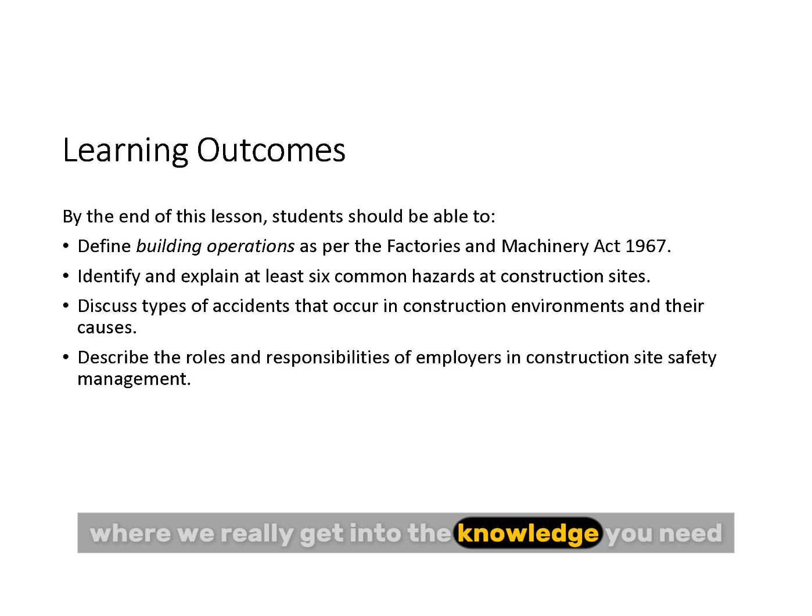Imagine a new skyscraper going up or a factory being built. It looks amazing, right? A real marvel. But behind all that, behind every single beam, there's this world of unseen dangers. It's a constant dance with risk. Today, we're pulling back the curtain on construction safety. It's not just rules and regs. It's about the people building our world. It's about progress and, yeah, a stronger economy, too.

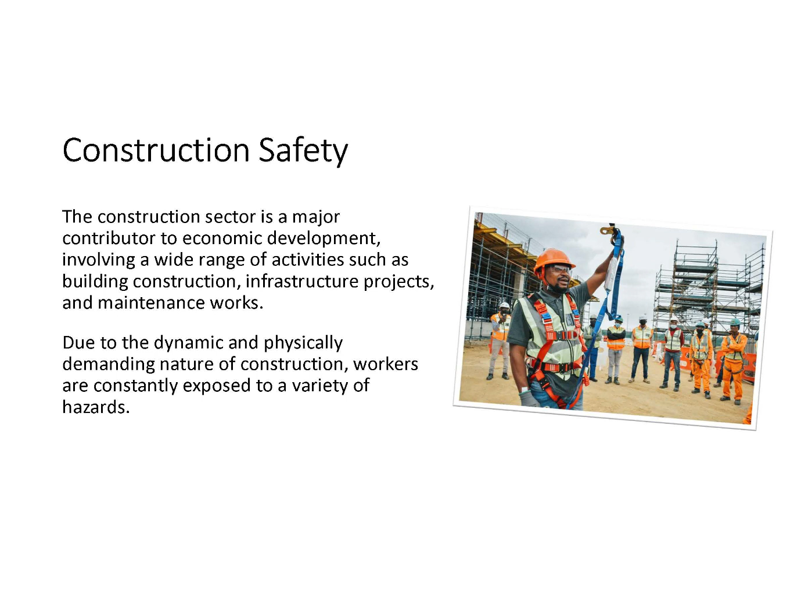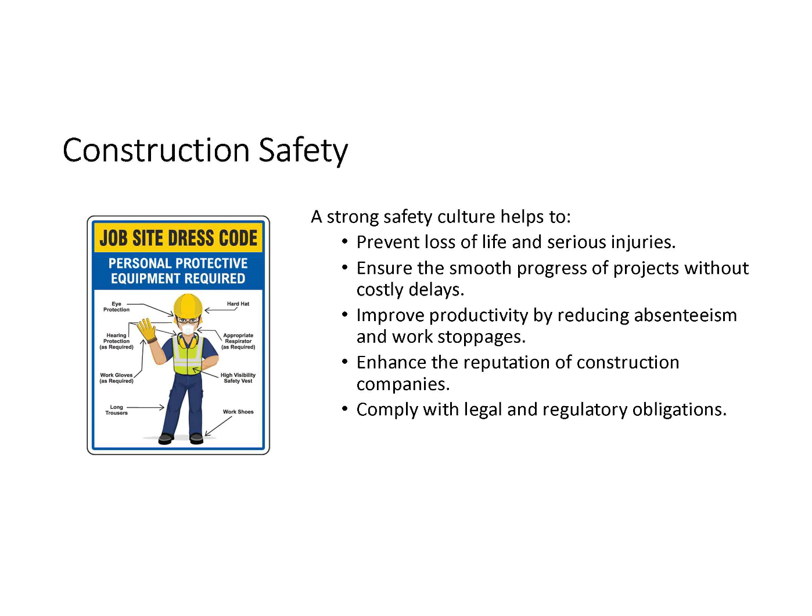And for our deep dive today, we're drawing on a whole range of sources: articles, detailed research, expert notes. They cover pretty much everything from the most common hazards you'd find on a site, right through to the complex legal stuff and what employers have to do. Our mission really is to pull out the absolute must-know info, find those facts that might surprise you, and help you see why this affects everyone, whether you're actually on a site or just curious about how things get built safely.

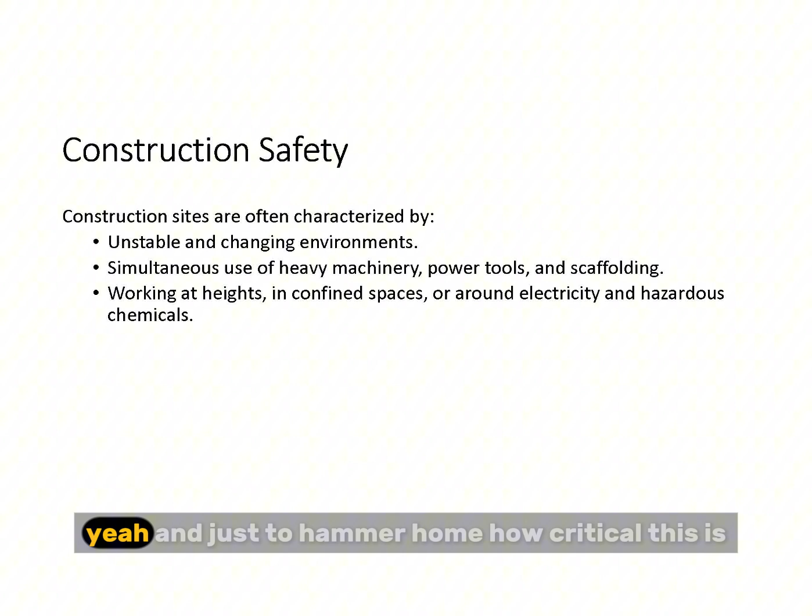Just to hammer home how critical this is, let's kick off with a pretty stark statistic. Our sources are clear: globally, and specifically in places like Malaysia, construction is consistently right up there at the top for workplace deaths and serious injuries, year after year. Just think about that for a moment. It immediately tells you why we need to talk about safety in this sector. It's not just numbers, it's actual lives.

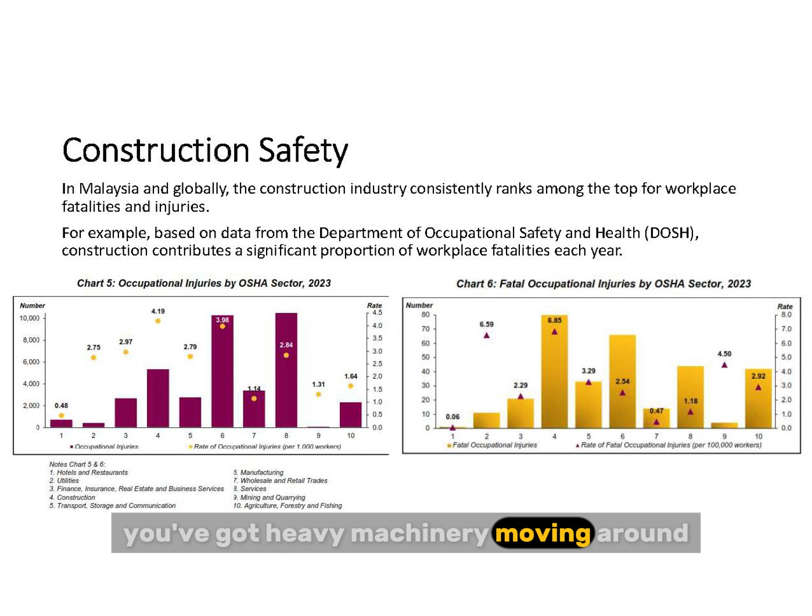And when you look at construction itself, the nature of the work, it becomes obvious why the risks are so high. These places are dynamic, they're physically tough, often unstable, and they're changing literally day by day. You've got heavy machinery moving around, power tools buzzing, temporary structures like scaffolds, all happening at the same time. Plus, workers are often way up high or maybe in tight, confined spaces, dealing with live electricity, potentially hazardous materials.

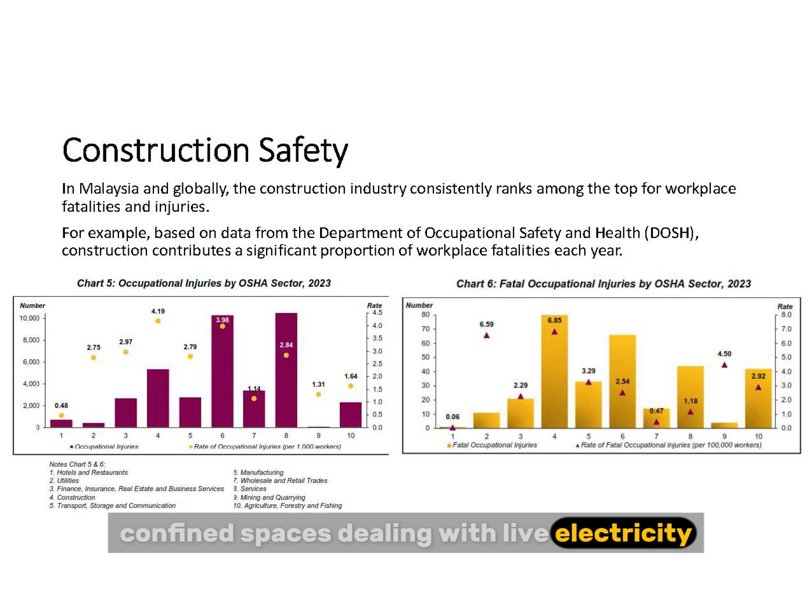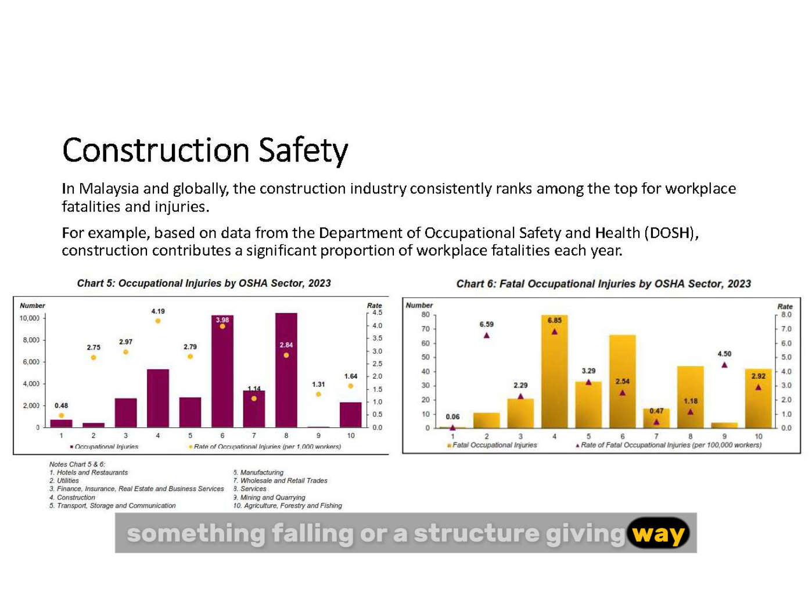It's incredibly complex. And that dynamic nature means the dangers aren't just the obvious ones, like something falling or a structure giving way. Our research points out other hazards too: ergonomic risks, for instance, the strain from lifting heavy stuff all day or repetitive movements. Then you've got environmental factors like extreme heat, maybe, or that constant loud noise that can cause real long-term problems. And maybe surprisingly, biological hazards, things you might not immediately think of, like mold or bacteria. And the fact that many jobs are temporary, often outdoors, just adds another layer of unpredictable risk.

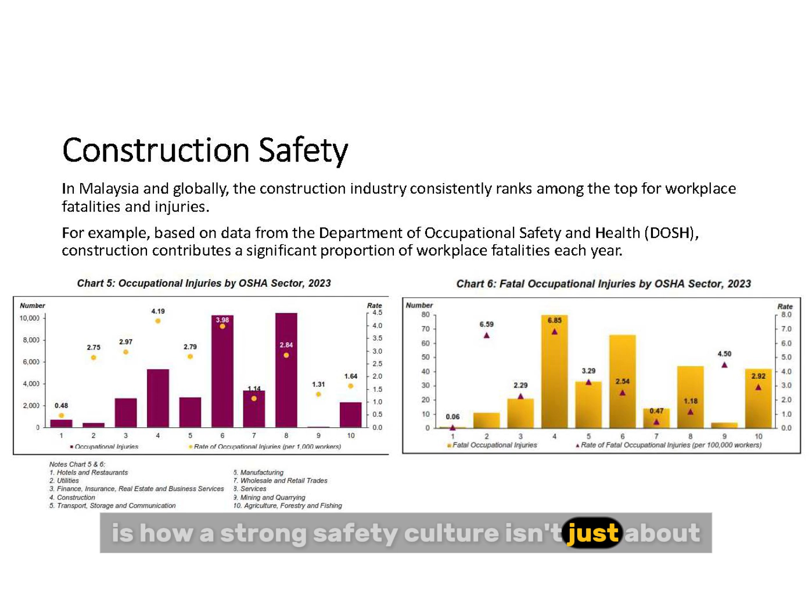And what's really interesting, perhaps a bit counterintuitive, is how a strong safety culture isn't just about ticking boxes or avoiding accidents. Our sources strongly suggest it actually drives innovation and project success. When workers feel safe, genuinely looked after, they're more engaged, they're more likely to suggest improvements, and ultimately they build better, faster, and yes, more economically. It flips the whole idea of safety from being just a cost to an advantage. Precisely, a competitive advantage.

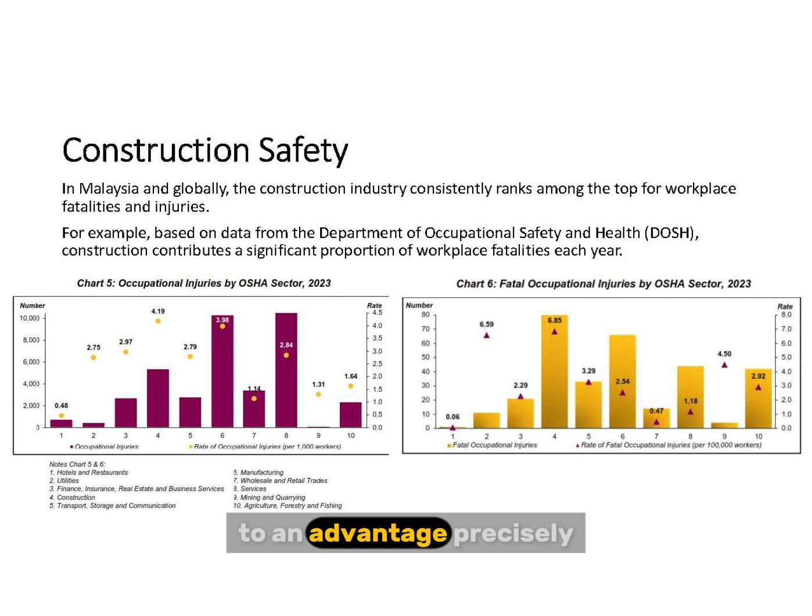Beyond preventing tragedy, it keeps projects running smoothly, avoids those expensive delays, boosts productivity because fewer people are off injured. And of course, it enhances the company's reputation and makes sure they're following the law.

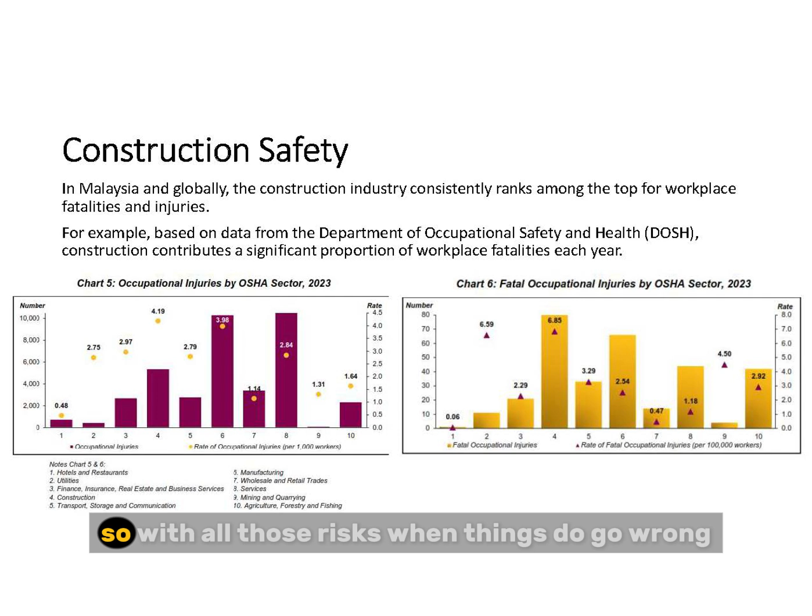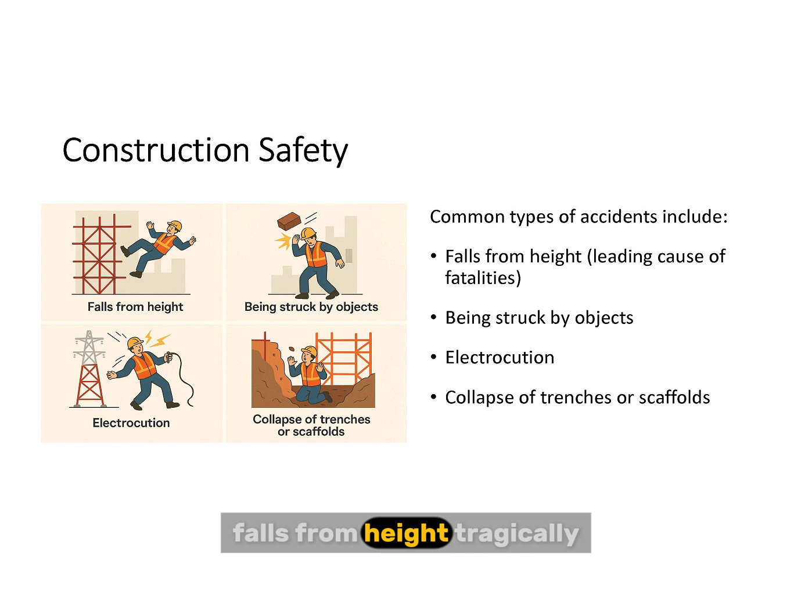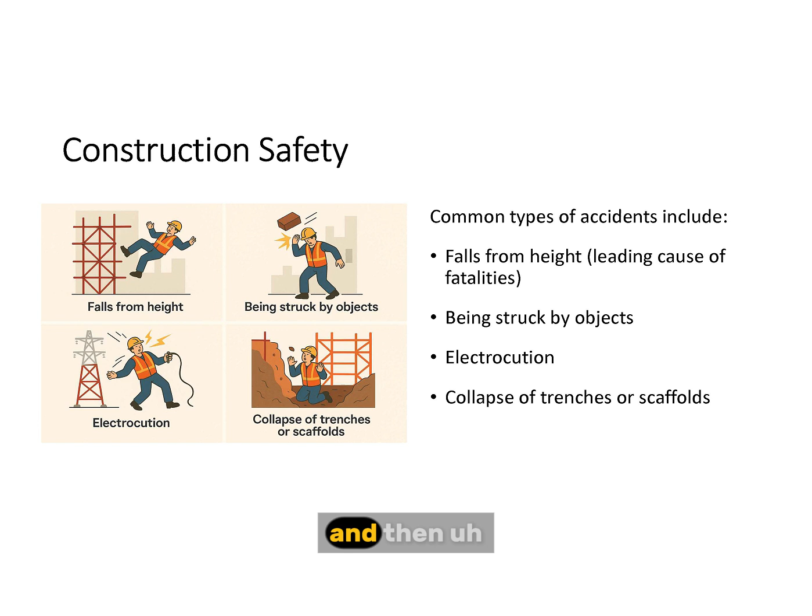So with all those risks, when things do go wrong, what are the most common and the most devastating types of accidents? Our sources are very specific here. Falls from height, tragically, that's the number one killer in construction. It's a really sobering fact. Beyond that, you see workers being struck by objects, electrocution is a big one, and then trenches or scaffolds collapsing suddenly. It's a harsh reality.

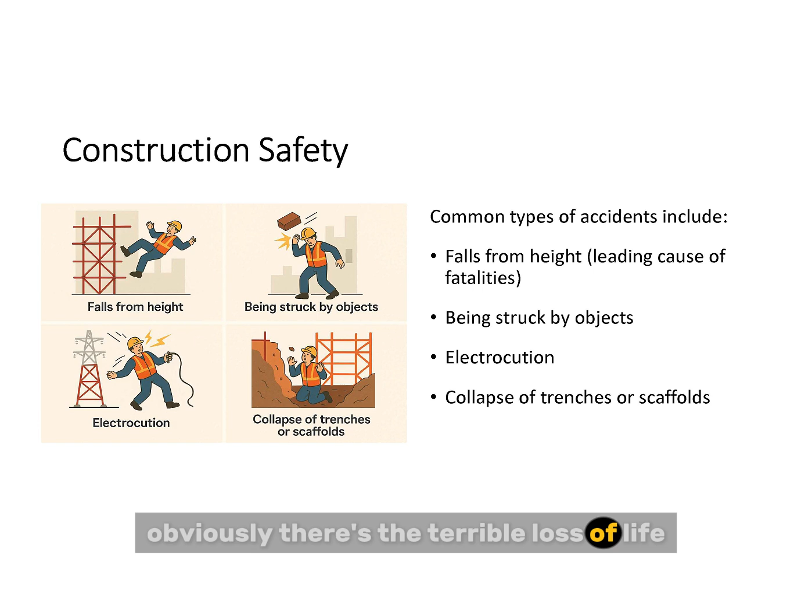And the impact just spreads outwards, doesn't it? It's not just the immediate incident. Obviously, there's the terrible loss of life or maybe long-term disability for the worker involved. But then employers face serious legal trouble, massive fines, projects get delayed, costs spiral. And something often missed, but incredibly important, is the emotional trauma. For the colleagues who saw it happen, for the families, that impact lasts.

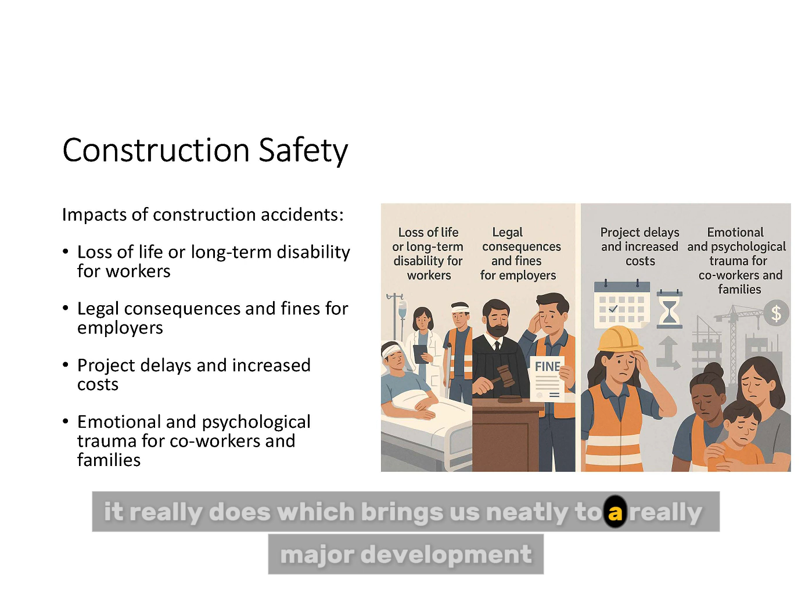Which brings us neatly to a really major development in the legal side of construction safety, especially relevant if you're operating in Malaysia. That's the OSHA Amendment Act 2022, A1648 as it's known. This wasn't just a minor update. It was designed specifically to significantly boost safety standards in construction and other sectors too. Yeah, this is a fundamental shift. It really changes the game.

Before, certain workplaces might have been exempt based on size or registration status. Not anymore. Under this act, all workplaces are covered by OSHA automatically. And crucially for this discussion, that includes construction sites of every size, no more exemptions based on worker numbers. That's a huge expansion.

And it goes deeper. The Act now says every single employer, no matter how small their operation, has to prepare and actually implement a written safety and health policy. It's not just good practice anymore, it's a legal requirement. It forces that top-down commitment.

Here's where it gets particularly interesting for construction: this idea of shared accountability. Contractors and subcontractors have always had duties under OSH law. But now the clients, the developers, the ones acting as principal employers, can also be held legally responsible for safety breaches on their projects. Project owners now share that legal accountability with the builders. So if you're developing a site, you're legally on the hook for safety, even if you're not managing the day-to-day stuff. That is a massive shift in responsibility.

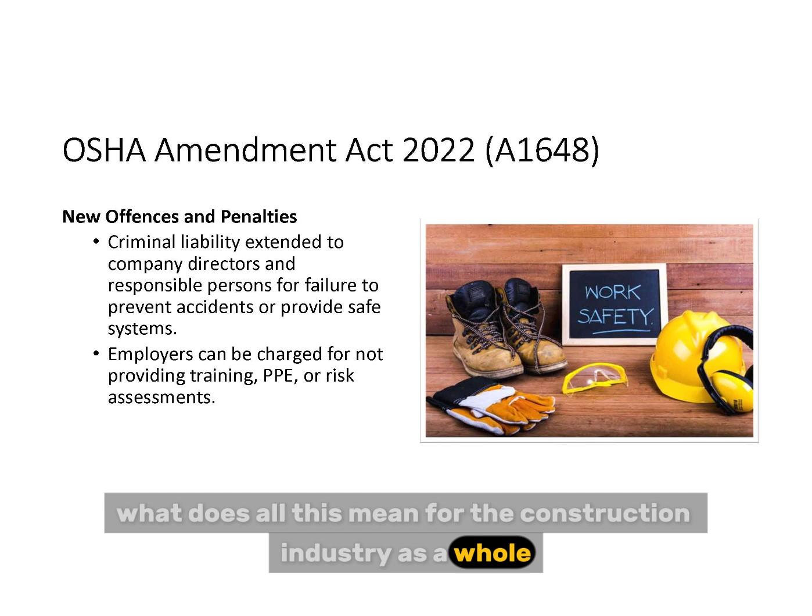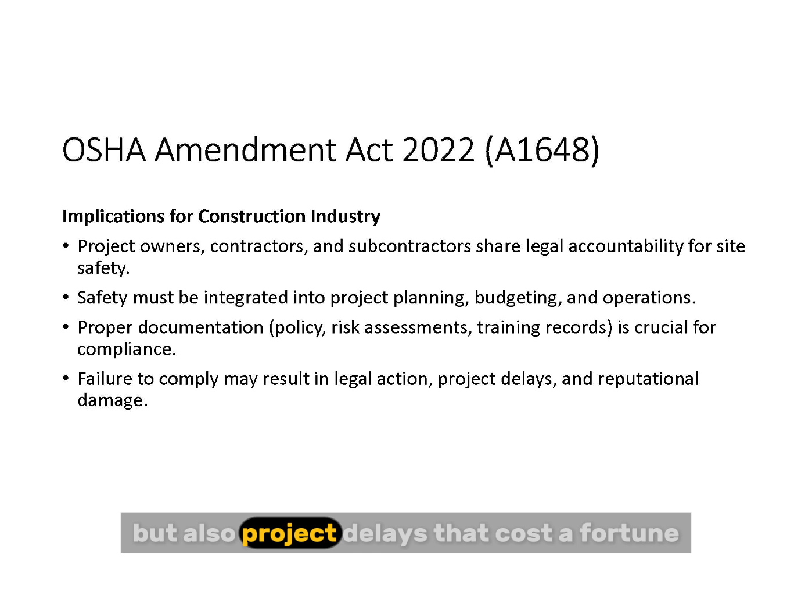So taking a step back, what does all this mean for the construction industry as a whole? What are the big takeaways? Well, the implications are pretty wide-ranging. Basically, safety can't be an afterthought anymore. It has to be baked into every stage of a project, right from the initial planning, the budgeting, through to the daily work on site. Proper documentation becomes absolutely critical: those written policies, the risk assessments, training records. It's not just nice to have, it's essential proof. And frankly, failing to comply means serious legal trouble, huge fines, yes, but also project delays that cost a fortune and real damage to a company's reputation. It's a complete shift in mindset and practice.

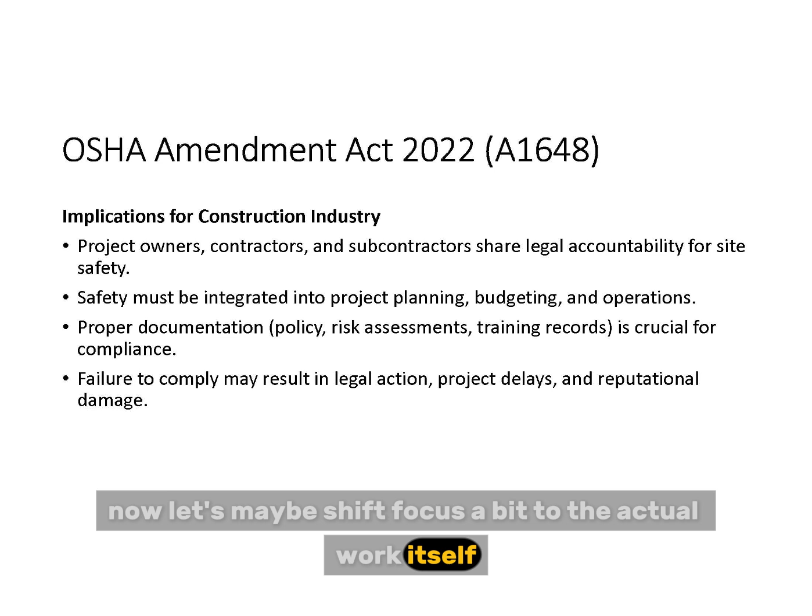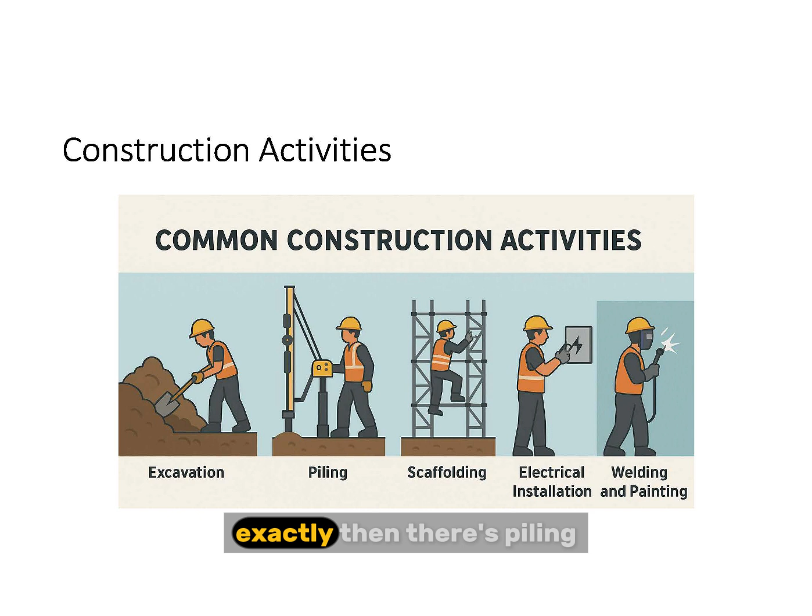Now, let's shift focus a bit to the actual work itself. What happens on a typical construction site? What are the common activities? We're talking things like excavation, digging trenches, foundations, basements, which immediately brings risks of collapse to mind. Exactly. Then there's piling, driving those big columns into the ground for support, and scaffolding, obviously, those temporary platforms for working up high. And that's just scratching the surface.

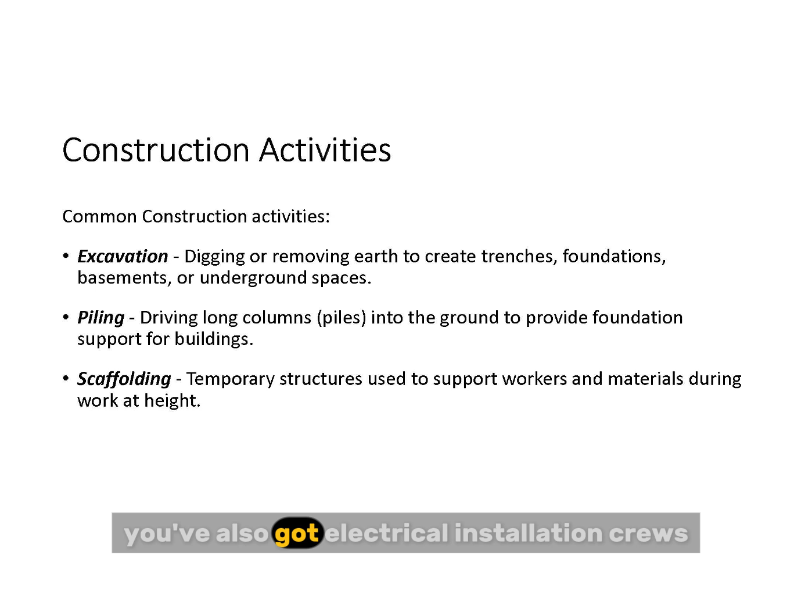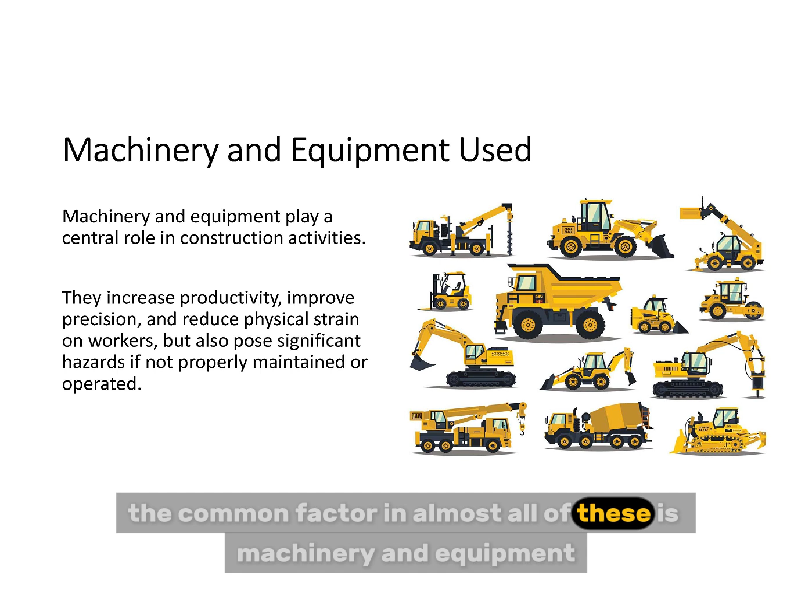You've also got electrical installation crews, material handling, lifting, moving, loading heavy stuff, and specialized jobs like welding or painting. The common factor in almost all of these is machinery and equipment. These tools boost productivity, they allow for incredible precision, but they also bring significant hazards if they're not looked after properly or if people aren't trained to use them right. It's that classic double-edged sword.

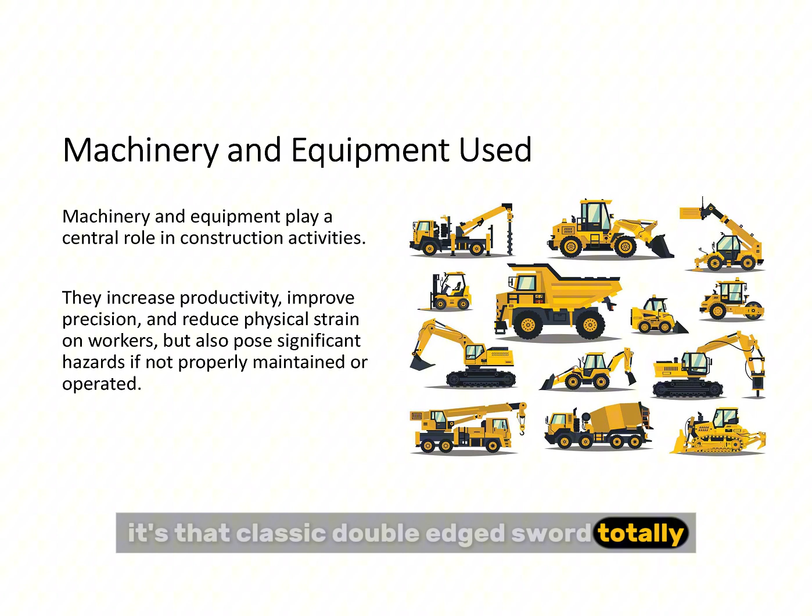Even simple hand tools, hammers, screwdrivers, can cause injuries if people aren't careful or if the tools are faulty. Then you have ladders and stairs for getting up high. Seems basic, but they have to be stable, positioned correctly. It's vital. Scaffolds, too, whether fixed or mobile, they need to be put up by trained people, inspected constantly. You can't cut corners there.

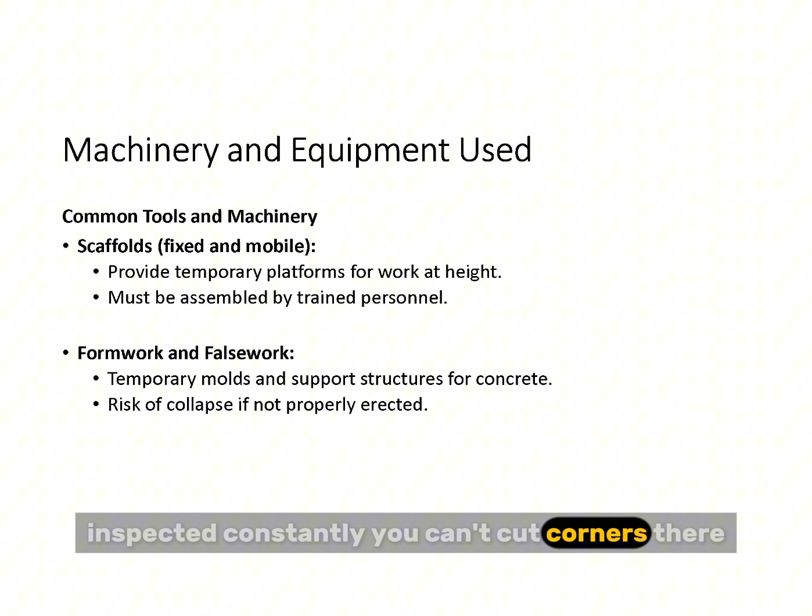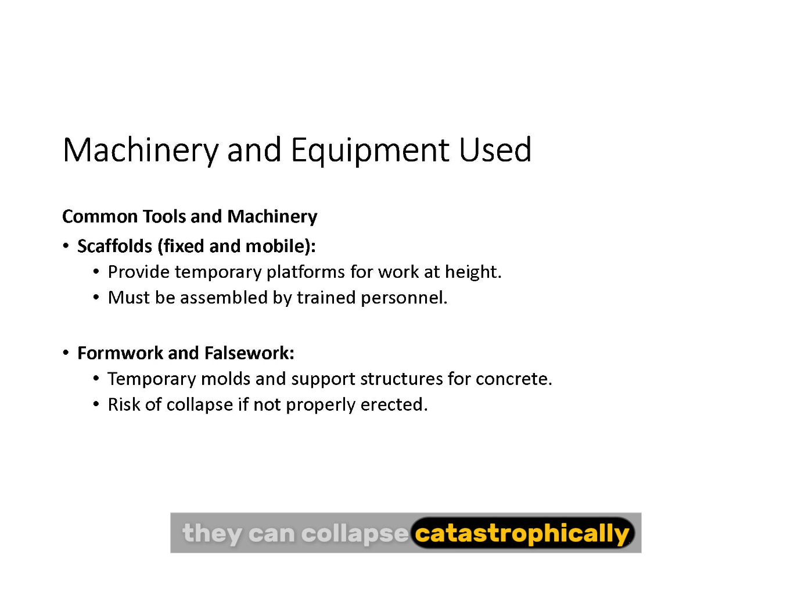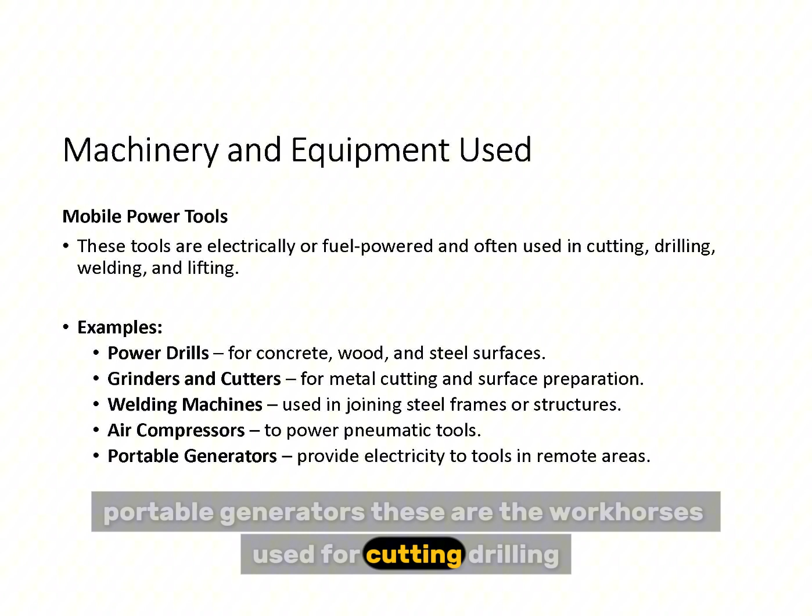No, you really can't. Then there's formwork and falsework, those temporary molds for concrete. If they're not built right, or if they're taken down too soon, they can collapse catastrophically. And finally, all those mobile power tools: drills, grinders, welding sets, air compressors, portable generators. These are the workhorses used for cutting, drilling, joining, lifting, everything.

And there's another layer of safety regulation here that really underscores the risk with some equipment, isn't there? The Certificate of Fitness. Yes, the COF. For certain high-risk heavy machinery, it's mandatory. It's an inspection and certification process run by DOSH.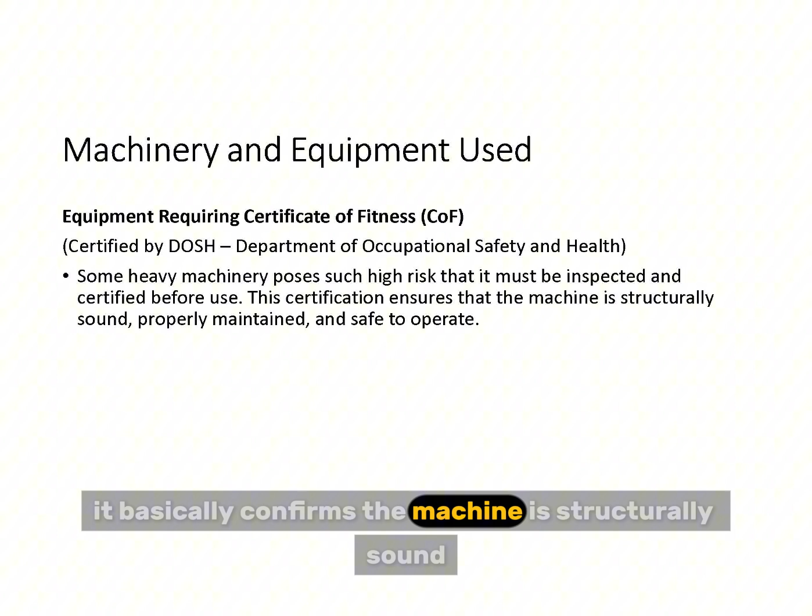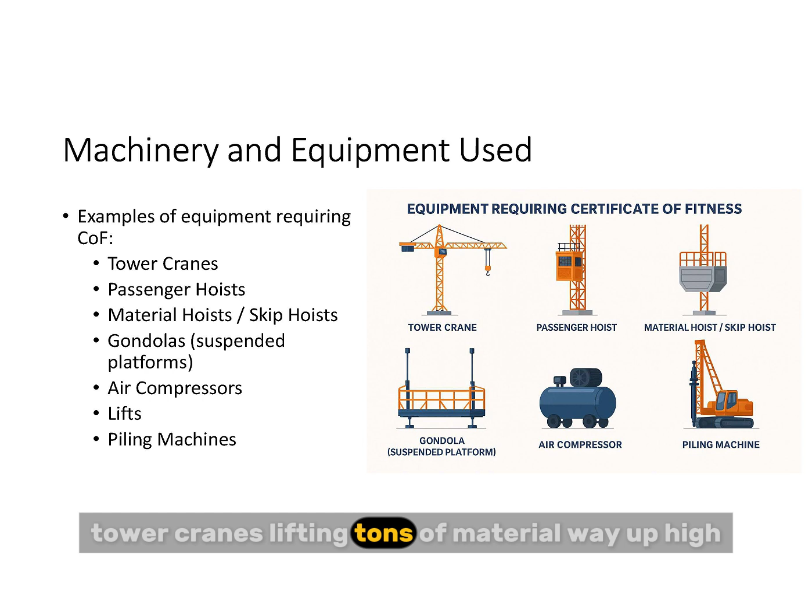It basically confirms the machine is structurally sound, it's being maintained properly, and it's actually safe to operate. So what kind of machines need this COF? Well, think about the really big stuff. Tower cranes lifting tons of material way up high.

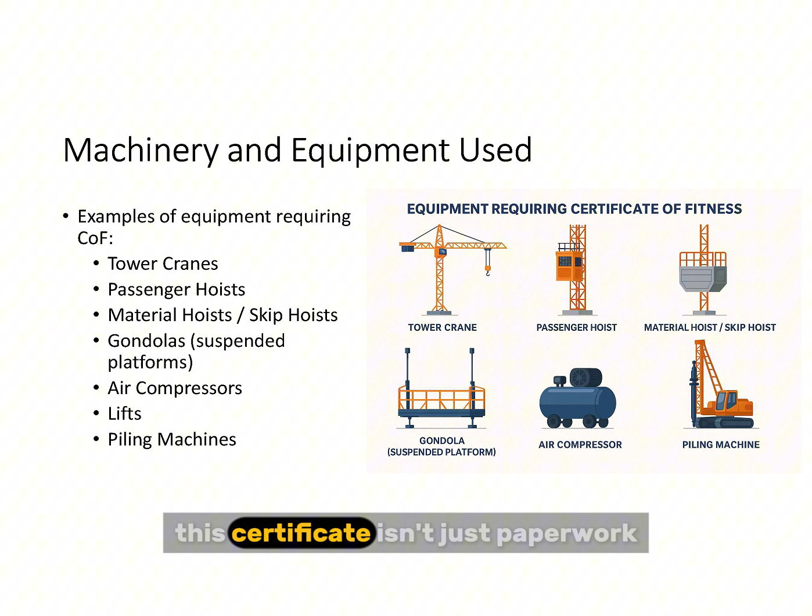Passenger hoists, material hoists, gondolas used for facade work, air compressors, lifts installed on site, those huge piling machines. This certificate isn't just paperwork, it's a critical check to prevent major failures and protect lives. Okay, let's dive deeper now into the specific types of hazards you find on construction sites.

They're really diverse. Starting with physical hazards, working at height, we've mentioned it, it's huge. The risk of falling from scaffolds, ladders, unfinished floors. And the control: proper fall protection is non-negotiable. Harnesses, guardrails, safety nets. Then you've got noise.

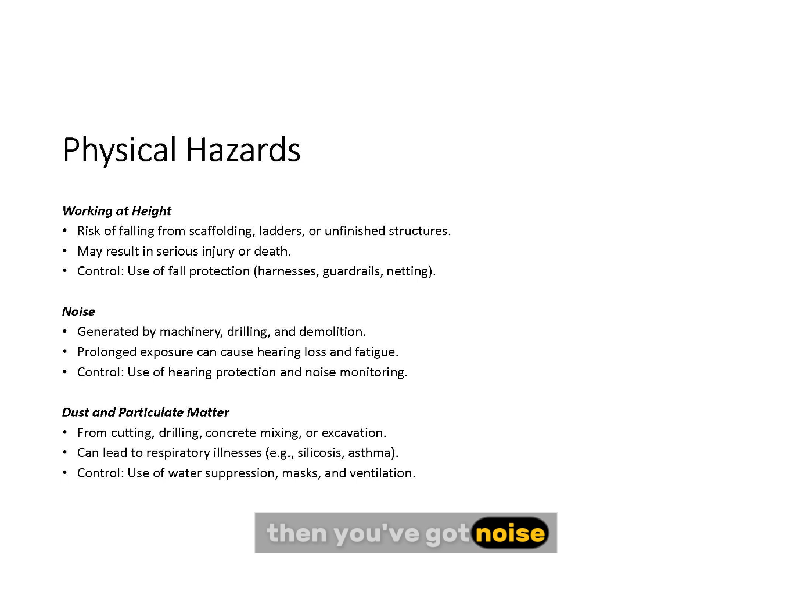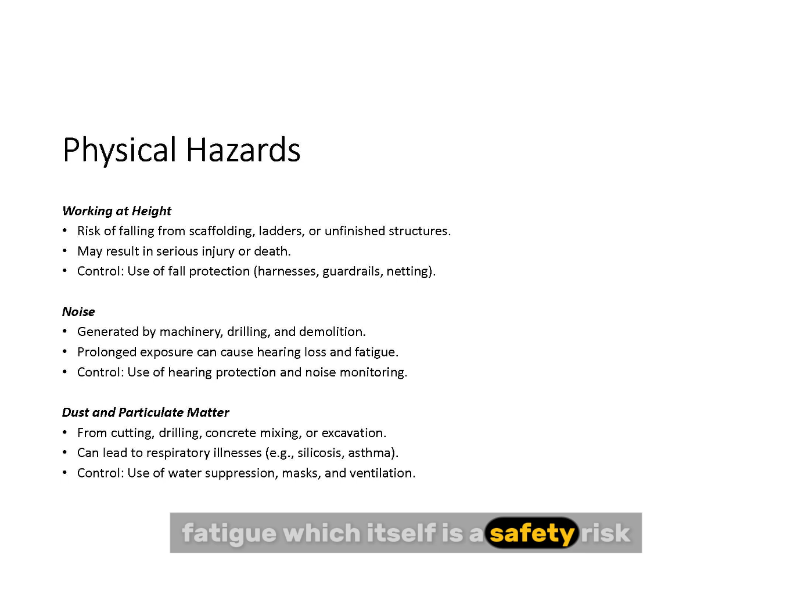It's almost unavoidable on many sites, from machinery, drilling, banging. Long-term exposure leads to hearing loss, fatigue, which itself is a safety risk. So mandatory hearing protection, noise monitoring programs are key controls.

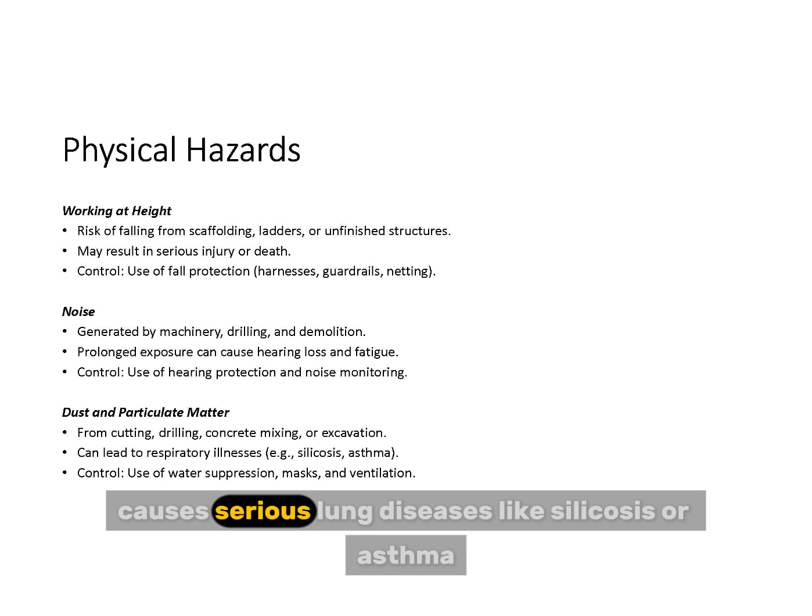And dust, particulate matter from cutting concrete, mixing cement, it gets everywhere. Causes serious lung diseases like silicosis or asthma. Controls include using water to suppress dust, wearing proper masks, and ensuring good ventilation.

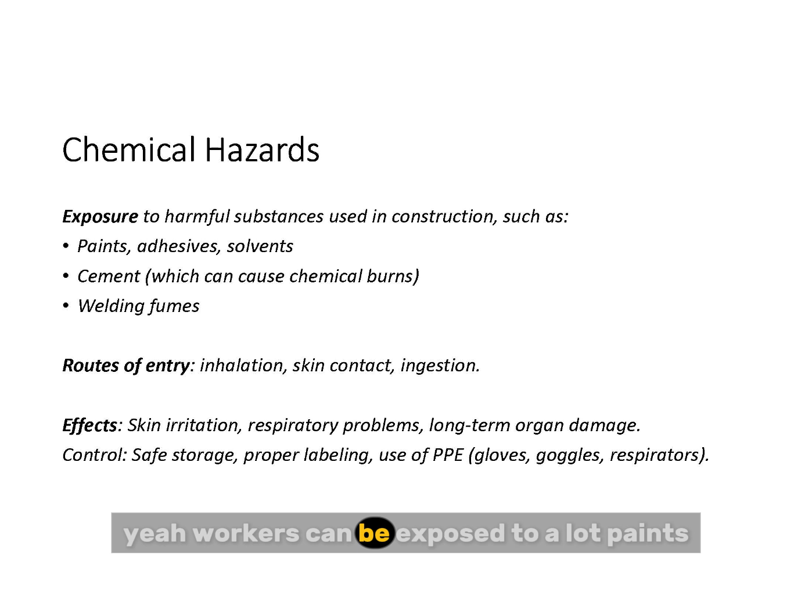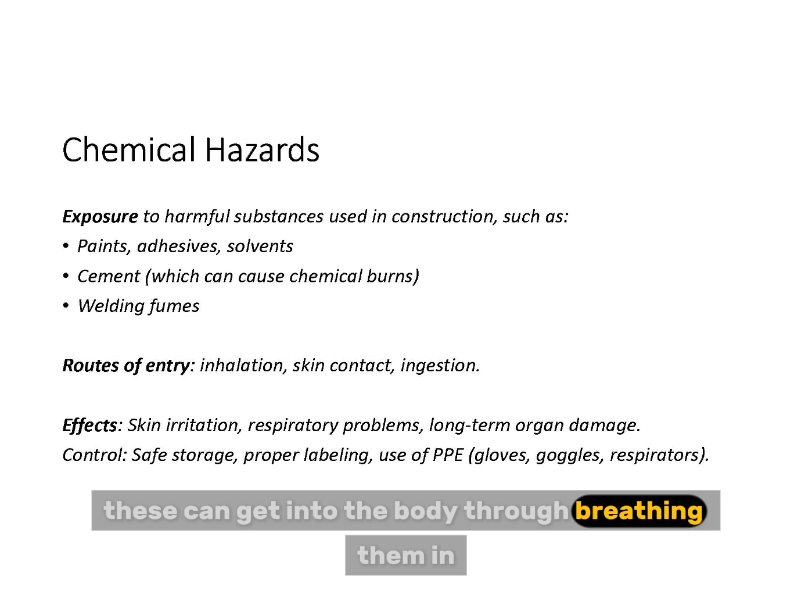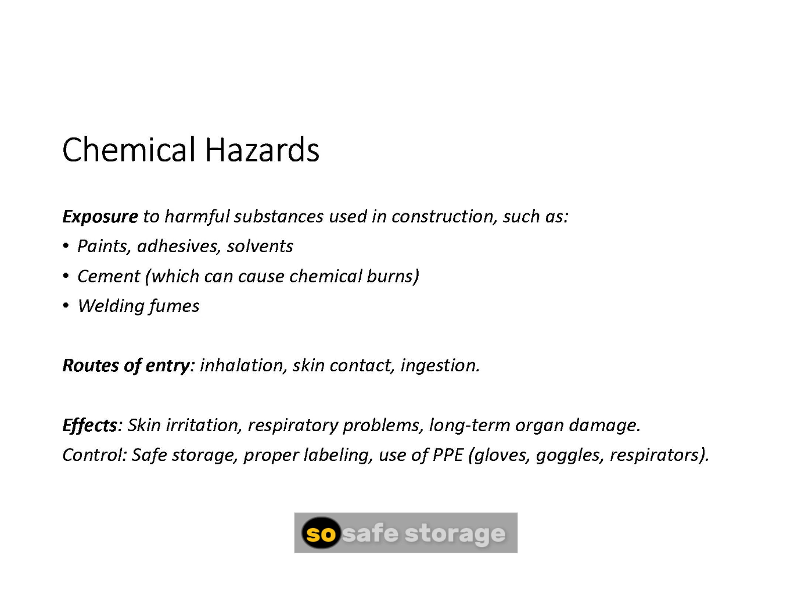Okay, what about chemical hazards? Yeah, workers can be exposed to a lot. Paints, adhesives, solvents, even wet cement, which can cause chemical burns. Welding fumes are another big one. These can get into the body through breathing them in, skin contact, sometimes even accidentally swallowing them. The effects range from skin irritation to serious respiratory issues or even long-term organ damage. So safe storage, clear labeling of chemicals, and the right PPE, like specific gloves, goggles, respirators, are absolutely essential.

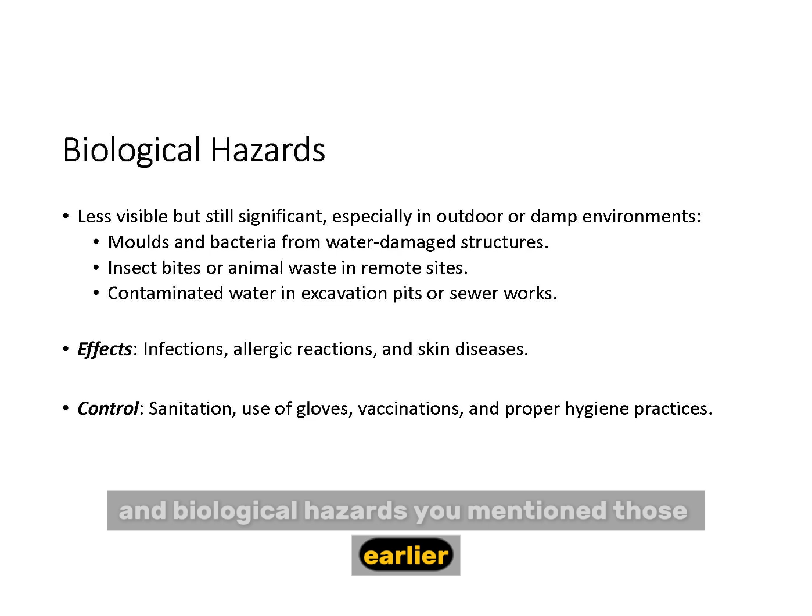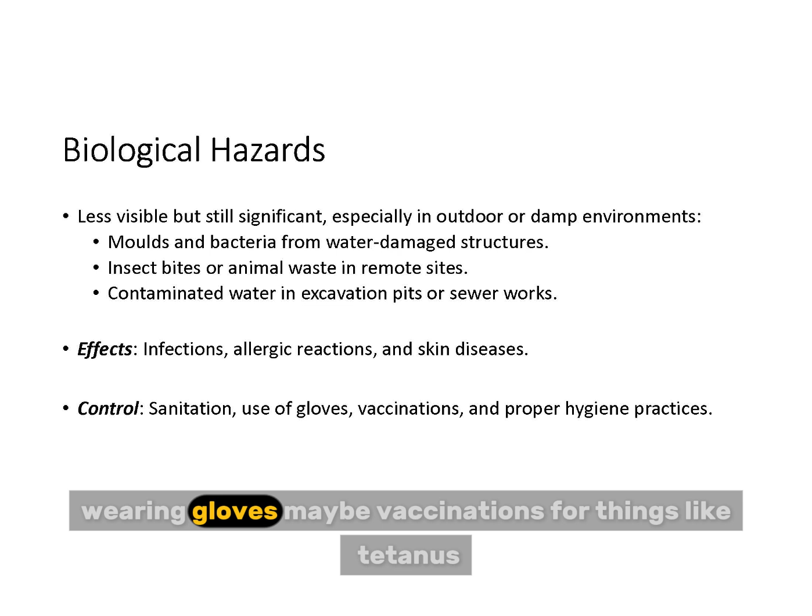And biological hazards, you mentioned those earlier. What does that look like on a construction site? It's often less obvious, especially outdoors or in damp areas. You might find mold or bacteria growing, maybe insect bites or stings, animal droppings on remote sites, or contaminated water in pits. These can lead to infections, allergic reactions, skin problems. Controls here are about good sanitation, wearing gloves, maybe vaccinations for things like tetanus, and just really good personal hygiene practices.

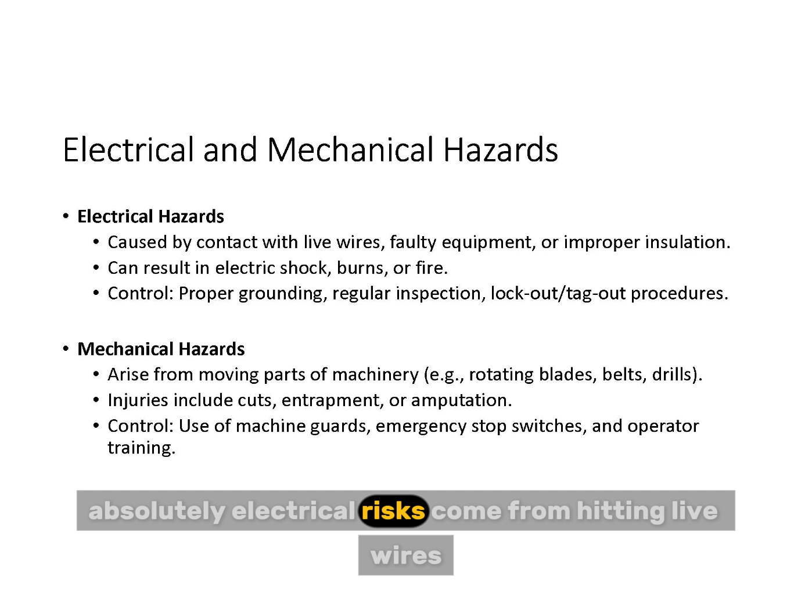And of course, electrical and mechanical hazards are everywhere. Absolutely. Electrical risks come from hitting live wires, using faulty equipment, leading to shock, burns, fires. Proper grounding, regular checks, and this critical procedure called lockout, tagout are vital.

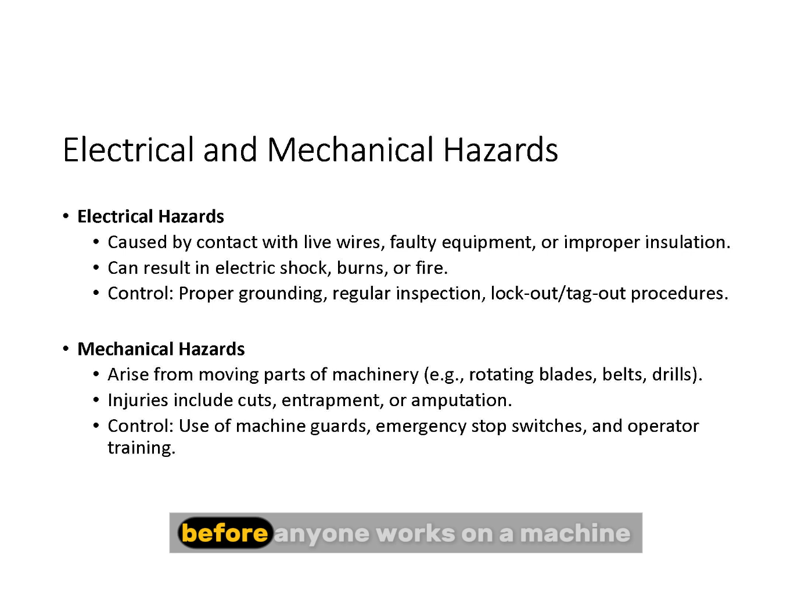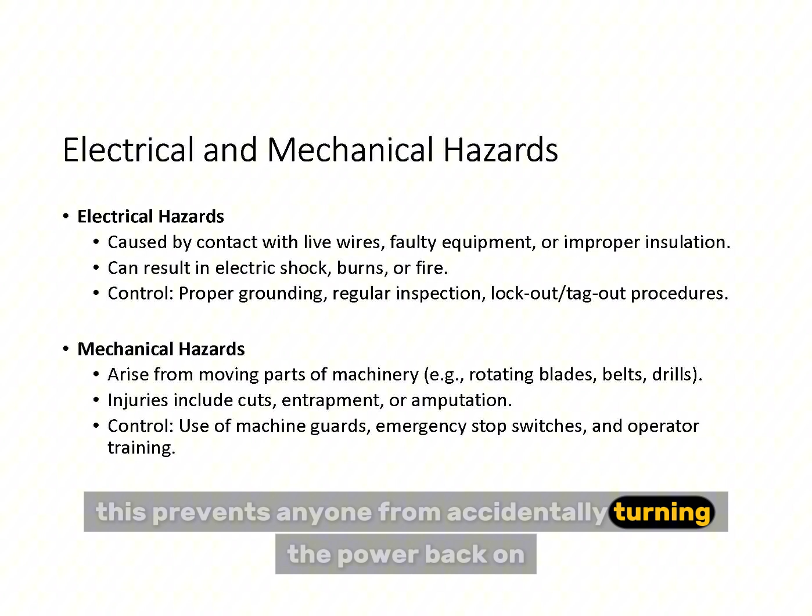Explain lockout, tagout quickly. Sure. Before anyone works on a machine, its power source is physically locked off, usually with a padlock, and a tag is attached saying 'do not operate.' This prevents anyone from accidentally turning the power back on while someone's working on it. Simple, but saves lives. Got it.

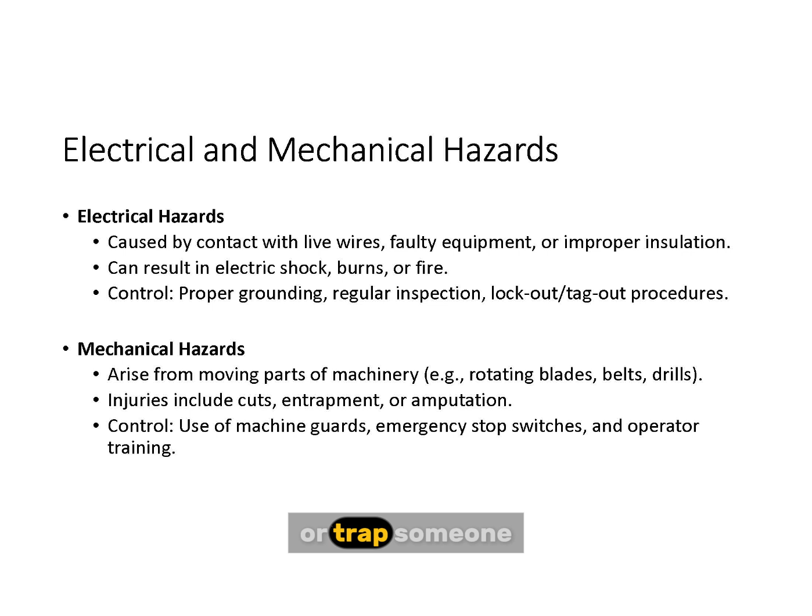And mechanical hazards, that's about the moving parts of machinery, blades, belts, gears, things that can cut, crush, or trap someone. The main controls are machine guards to physically block access, clearly visible emergency stop buttons, and really thorough operator training.

And finally, ergonomic hazards. These seem less dramatic maybe, but can be really debilitating. They definitely can. This is about poor posture, doing the same motion over and over, or lifting heavy things improperly. Think about constantly bending or twisting or carrying heavy loads without help. It leads to musculoskeletal disorders. Back pain is a huge one, and general fatigue, which again increases accident risk. So training on proper lifting techniques, using mechanical aids like hoists or carts, and rotating jobs can make a big difference.

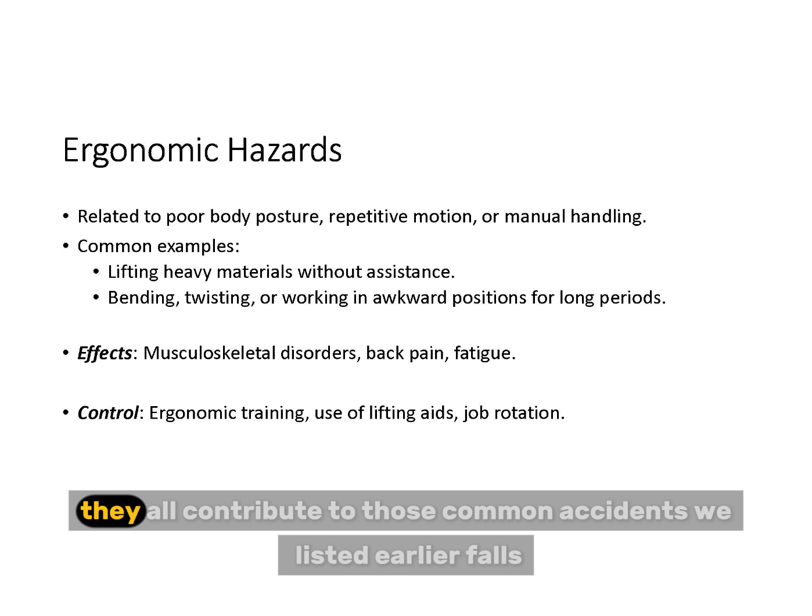And really, all these different hazards, physical, chemical, biological, electrical, mechanical, ergonomic, they all contribute to those common accidents we listed earlier: falls, being struck by things, collapses, shocks, and so on.

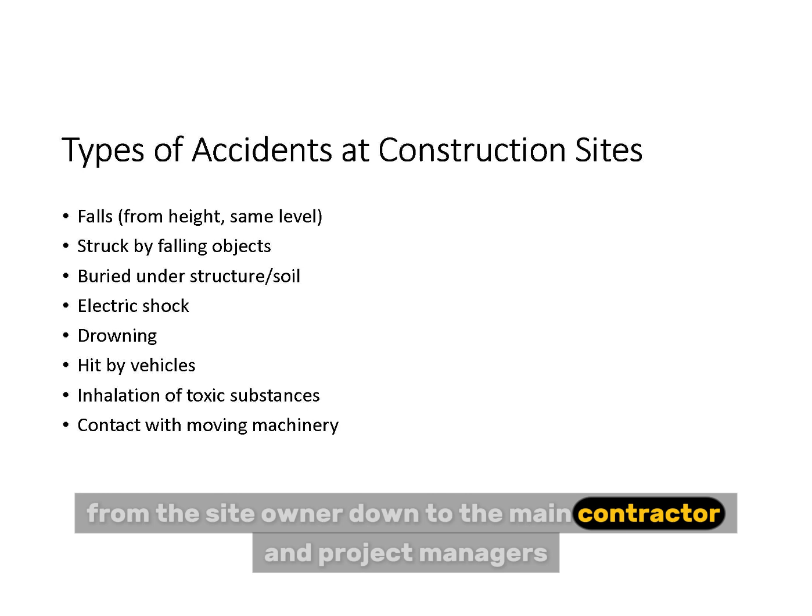Okay, so we've got this complex web of hazards, significant legal changes. It really puts the spotlight on the employer, doesn't it? From the site owner down to the main contractor and project managers. How do they actually manage safety day to day? What are their core responsibilities?

Well, the bottom line, legally and ethically, is that employers are responsible for their workers' safety. Full stop. And effective safety management isn't just about avoiding fines. It genuinely prevents accidents. It builds that positive safety culture we talked about. And honestly, it makes the project run better.

So what's the first step? That written policy. Exactly, that's foundational and now legally required by the OSHA Act. It's more than just a piece of paper. It's the employer's formal commitment. It needs to outline their safety goals, who's responsible for what, and the strategies they'll use. And crucially, it has to be communicated effectively to everyone on site and reviewed regularly to keep it relevant.

And they need people to implement this policy, right? Safety personnel. Absolutely, competent people are key.

Roles like the Safety and Health Officer (SHO) or Site Safety Supervisor (SSS) are vital for doing inspections and checking compliance day to day. And that Safety and Health Committee, in higher risk workplaces, is crucial for investigating incidents, advising management, and making sure workers have a voice in safety matters.

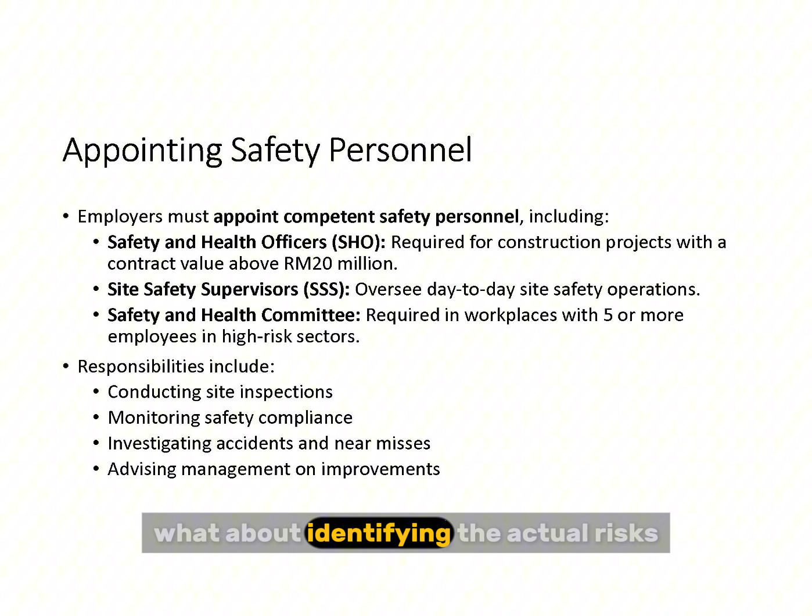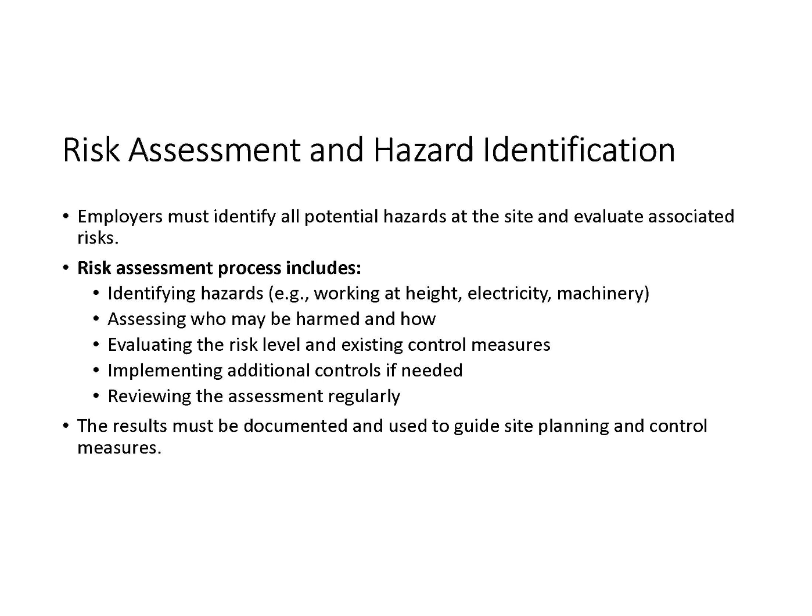Okay, policy people. What about identifying the actual risks? That's risk assessment and hazard identification. It's fundamental, a systematic process. Look for hazards, figure out who could be harmed and how badly, check if existing controls are enough, and then put in place any extra measures needed. And critically, document everything. Those findings need to guide how work is planned and carried out.

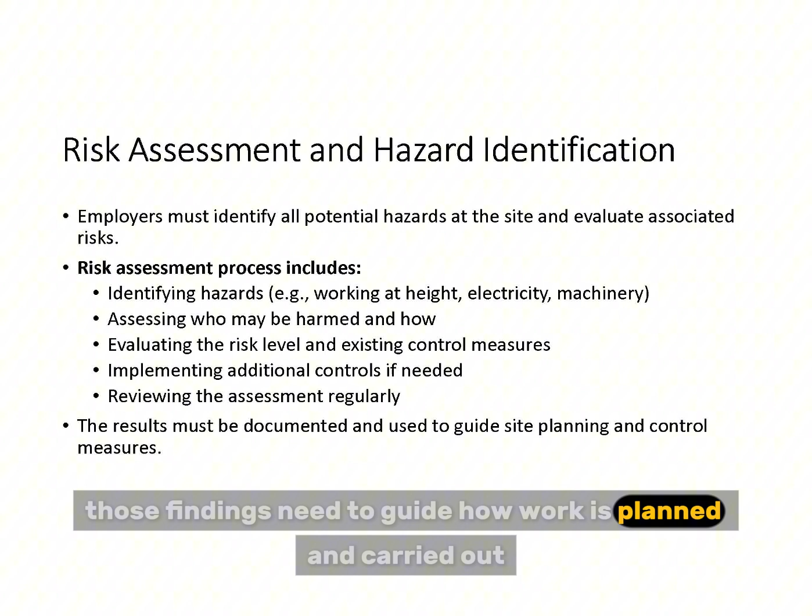And once risks are known, you need procedures to deal with them. Precisely, safe work procedures, or SWPs. These are basically step-by-step guides for doing specific tasks safely. Could be for working at height, handling a certain chemical, operating a crane. They need to be clear, easy to understand, specific to the task, developed with input from experienced people, and readily available to the workers doing the job. Think of it as a safety roadmap for each task.

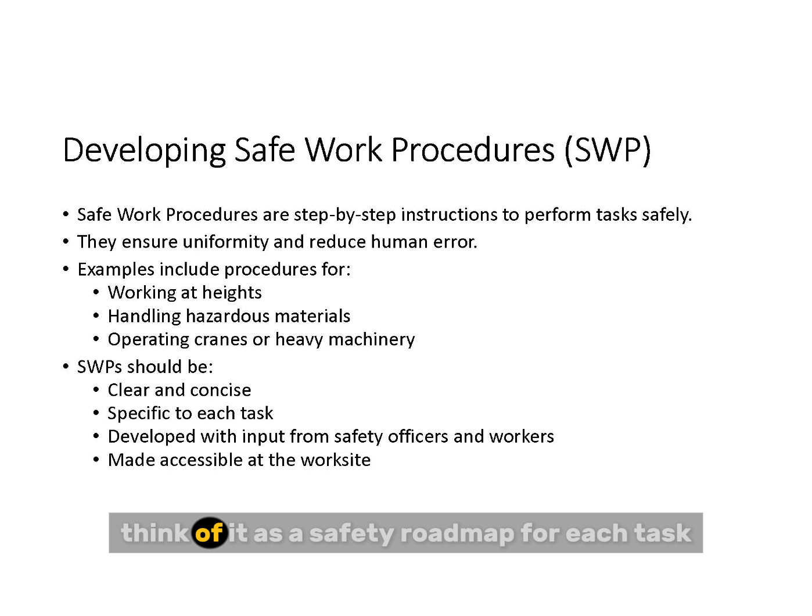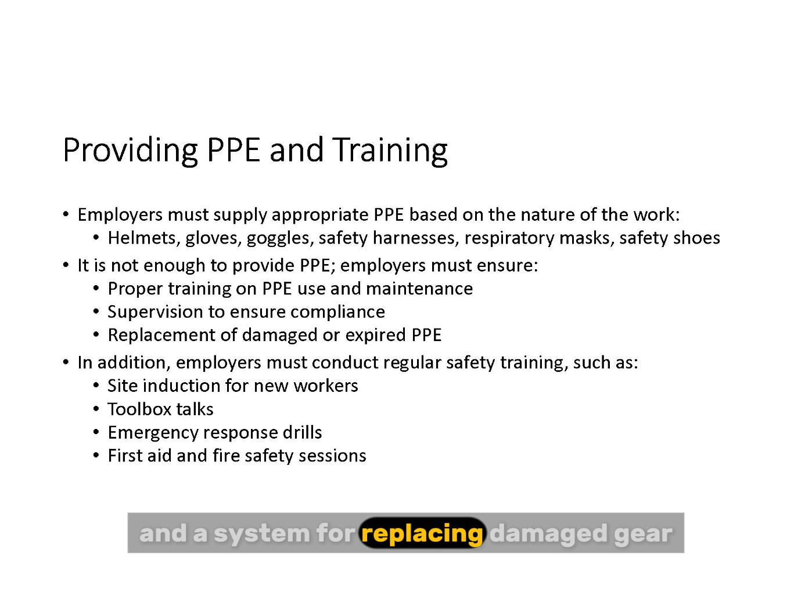And providing the right gear, PPE. Yes, employers must provide appropriate PPE - helmets, gloves, goggles, harnesses, masks, safety boots, whatever the risk assessment dictates. But as our sources really stress, just handing it out isn't enough. You need to ensure it's the right type for the hazard, that it fits properly, that people are trained how to use and maintain it. And you need supervision to make sure it's actually being used correctly, and a system for replacing damaged gear.

Alongside that, regular safety training is non-negotiable. Site inductions, toolbox talks before shifts, emergency drills, first aid training, keeping safety constantly visible.

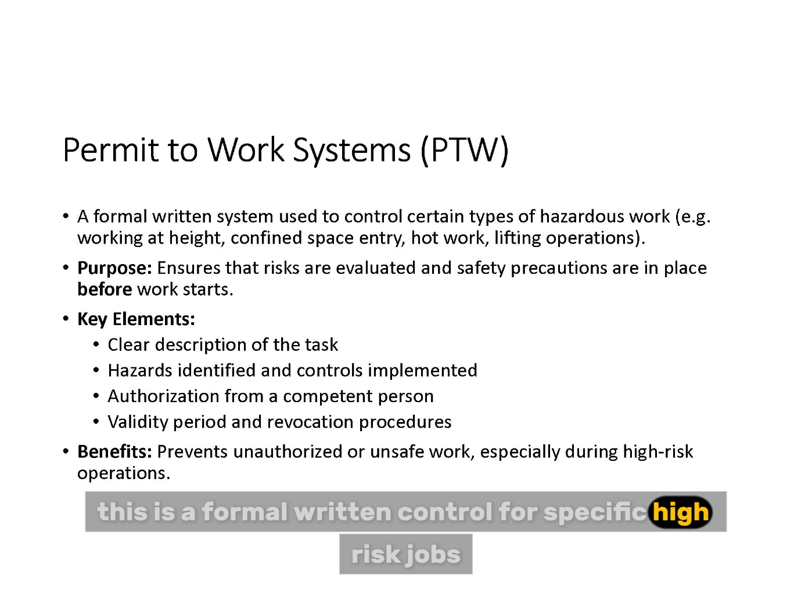And for the really dangerous stuff, there's the permit to work system. Yes, the PTW - this is a formal, written control for specific high-risk jobs. Think entering a confined space, doing hot work like welding near flammable materials, or complex lifting operations. The permit ensures that all the risks have been assessed and all the safety precautions are physically in place before that hazardous work starts. It's a crucial checkpoint to prevent mistakes.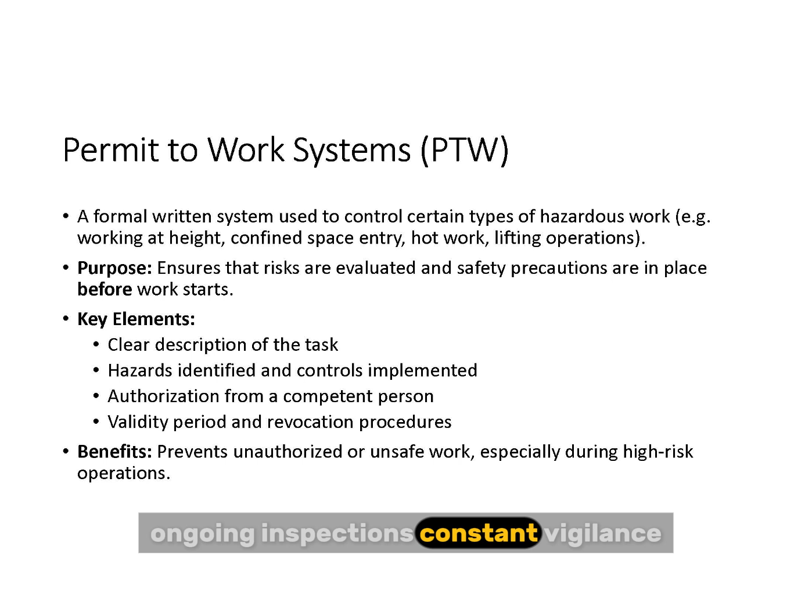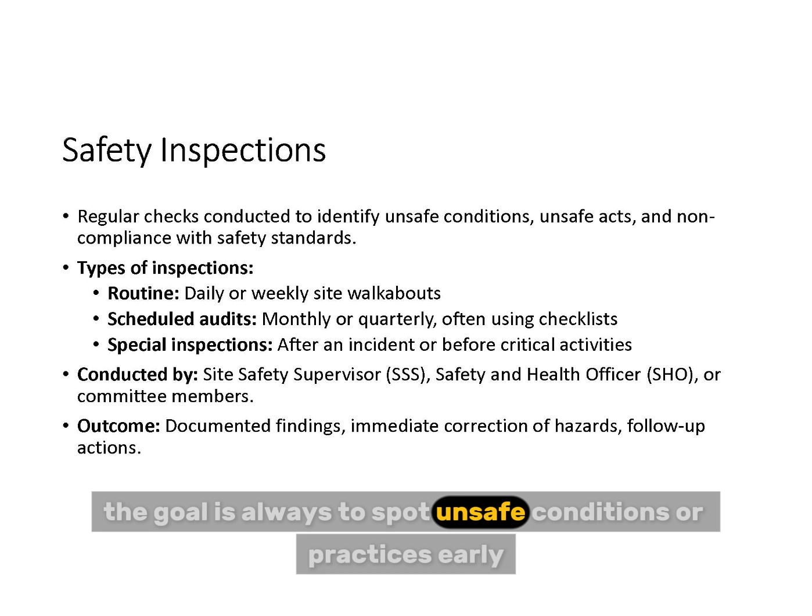Makes sense. And keeping an eye on things ongoing - inspections, constant vigilance. Regular safety inspections are key. Could be daily walkthroughs by supervisors or more formal, scheduled audits by the safety team. The goal is always to spot unsafe conditions or practices early and get them fixed immediately.

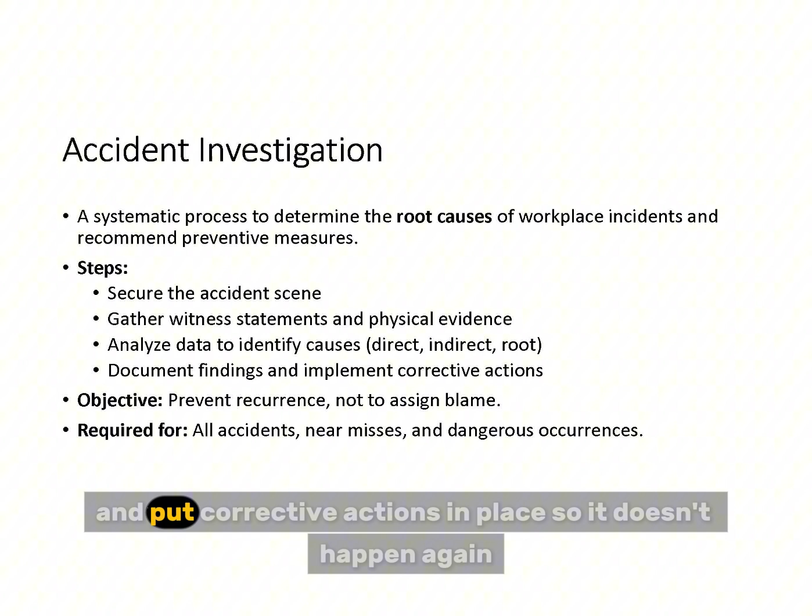And if an accident does happen, a thorough investigation is essential - not to point fingers, but to find the root causes. Why did it really happen? Gather evidence, analyze it, and put corrective actions in place so it doesn't happen again.

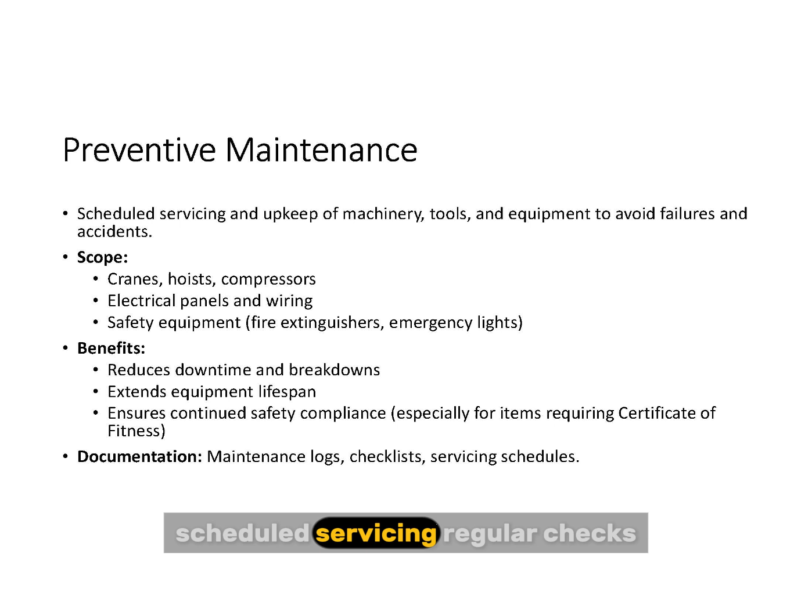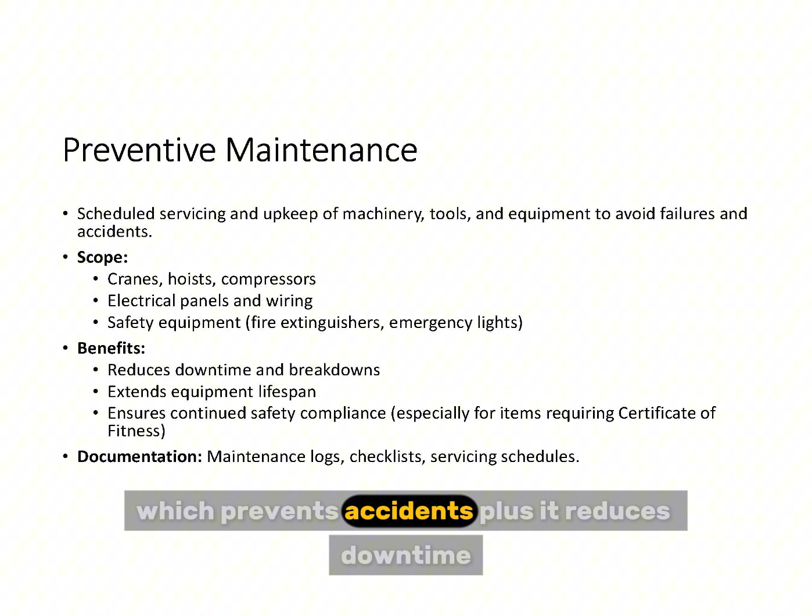Prevention is the aim. And what about the machinery itself? Keeping it safe - preventive maintenance. Absolutely vital. Scheduled servicing, regular checks, diligent upkeep of all machinery, tools, equipment, cranes, hoists, electrical systems, everything. It stops equipment failing unexpectedly, which prevents accidents. Plus, it reduces downtime, makes equipment last longer, and ensures compliance, especially for those items needing that certificate of fitness.

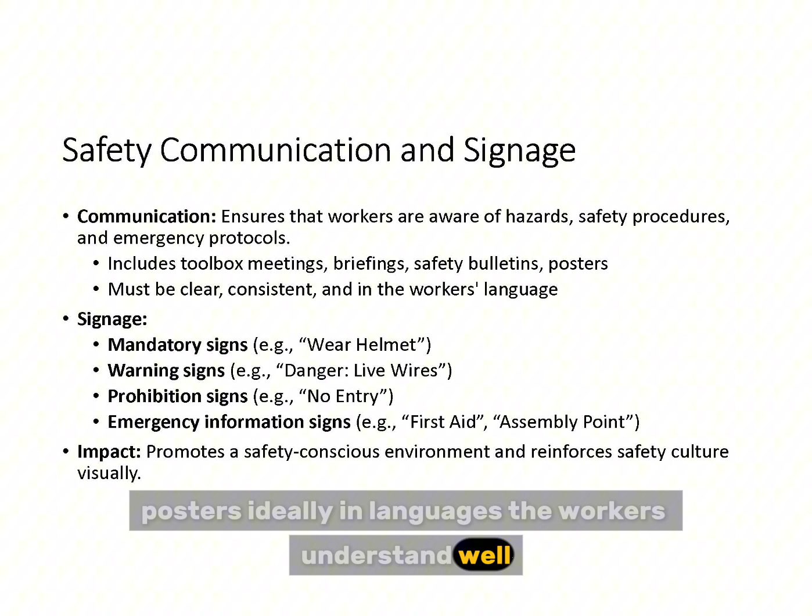And finally, just getting the message across - communication. Hugely important. Clear, consistent communication is the glue that holds it all together. Safety meetings, bulletins, posters, ideally in languages the workers understand well, and effective signage - the mandatory signs like wear hard hats, warning signs like danger high voltage, prohibition signs like no entry, emergency signs like fire exit this way. They all constantly reinforce the safety rules and contribute to a safety-conscious environment.

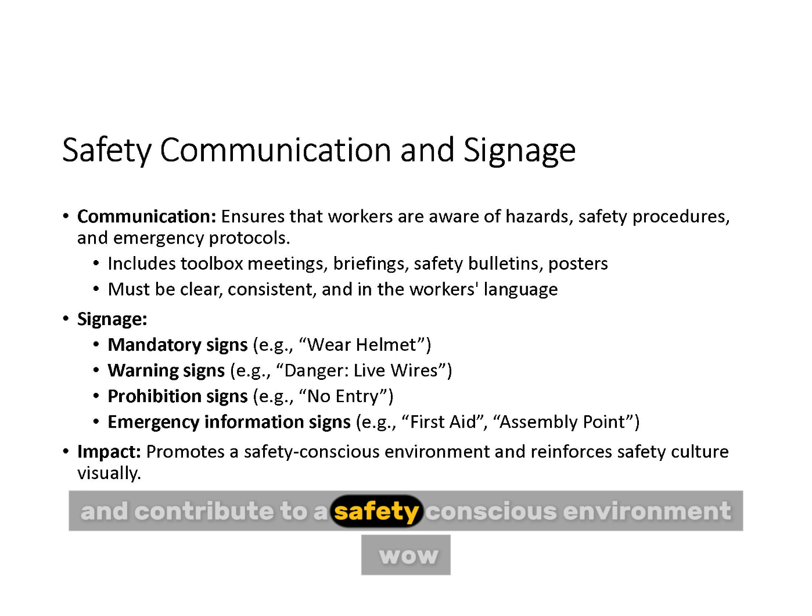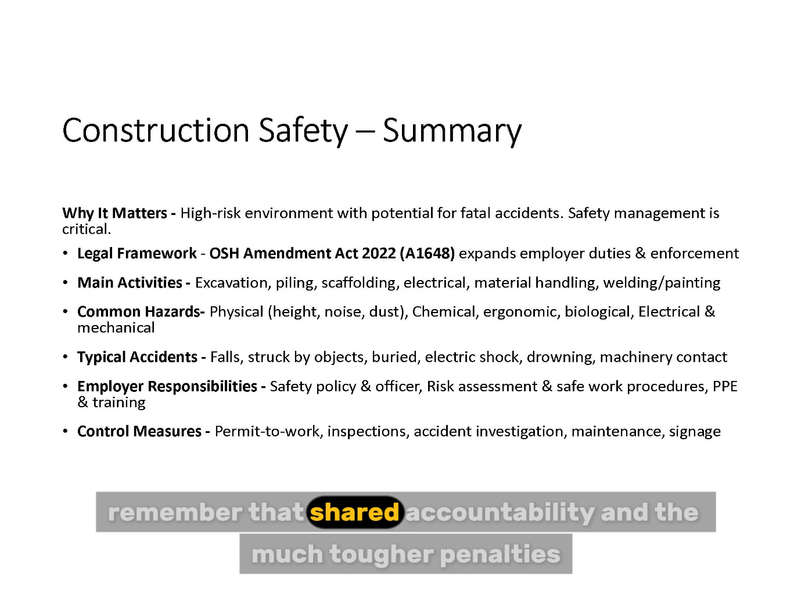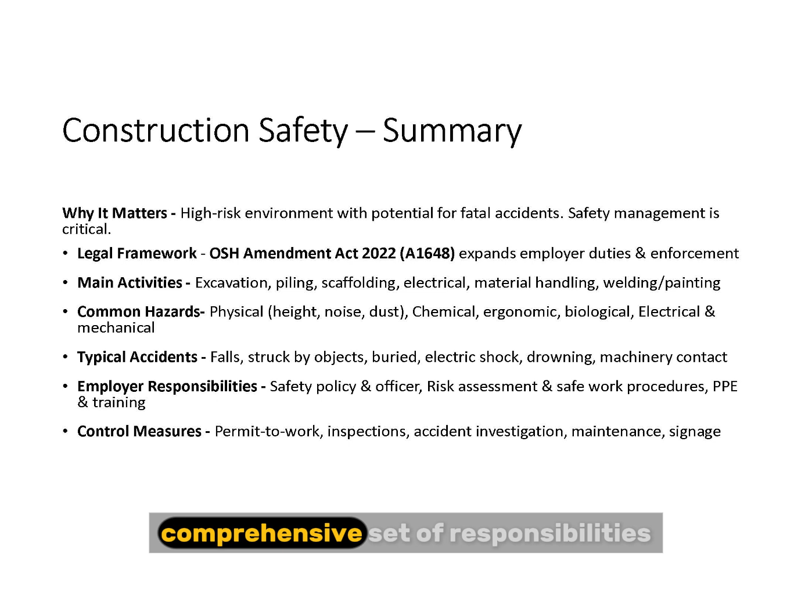Wow, okay, that was incredibly thorough - a real deep dive into a complex but absolutely vital area. So just to quickly recap the key takeaways: construction is inherently high risk. The legal landscape has shifted significantly with the OSH Amendment Act 2022. Remember that shared accountability and the much tougher penalties. The range of hazards is incredibly diverse, from the obvious physical stuff to chemical, biological, ergonomic risks. And employers have a massive, comprehensive set of responsibilities to manage these risks and keep people safe. It's clear safety isn't just a department, it's embedded in everything. Absolutely, it's fundamental to building responsibly, efficiently, and building a better future.

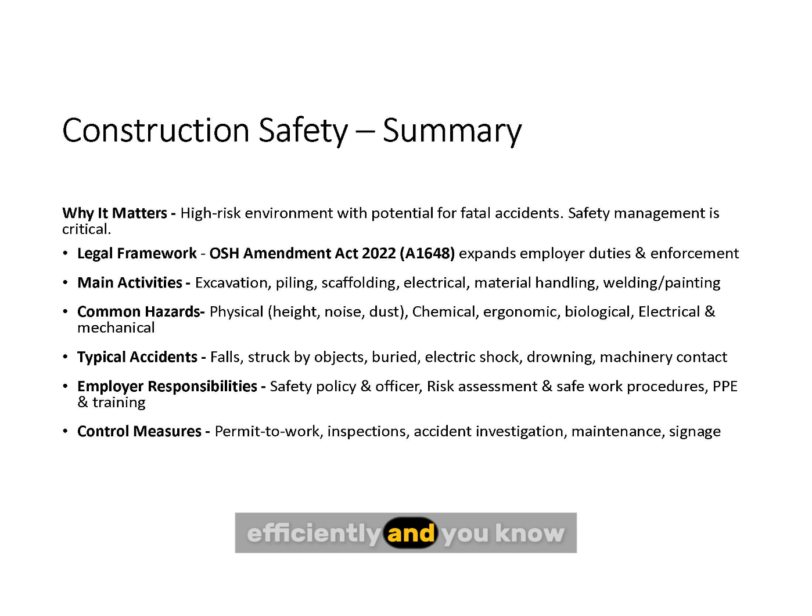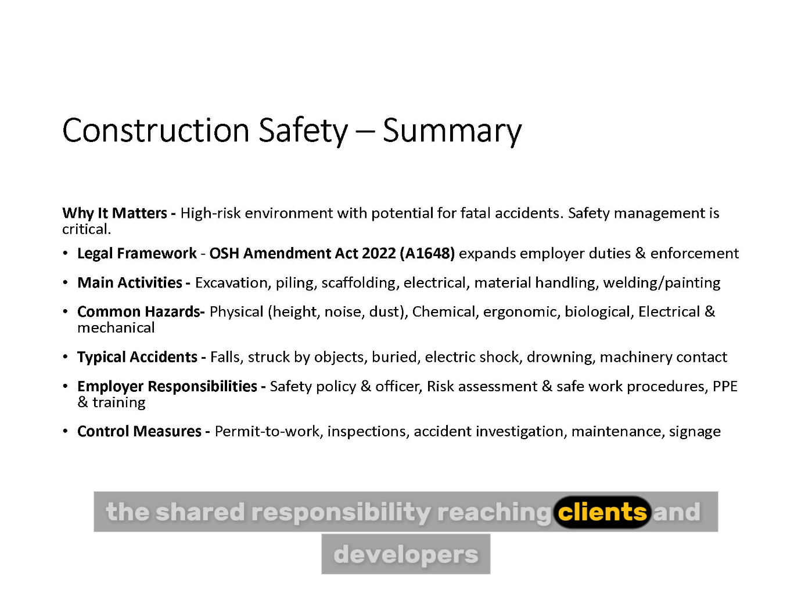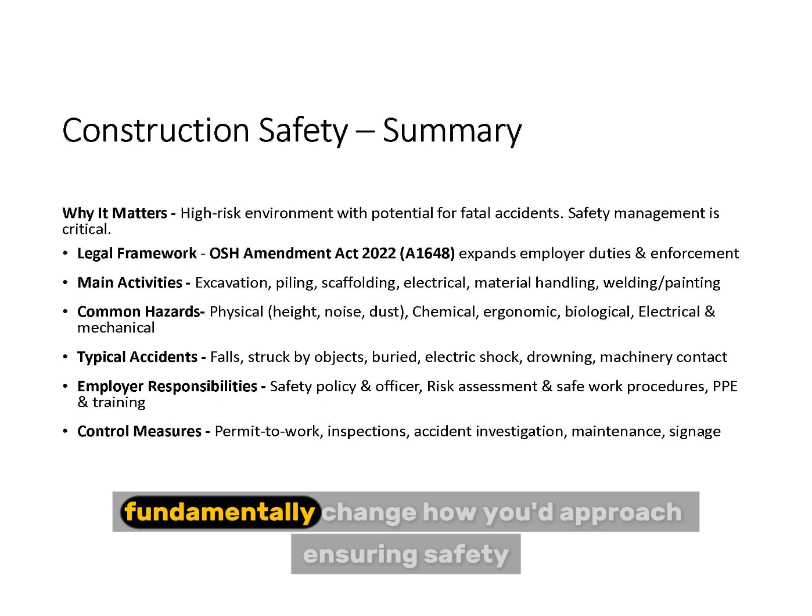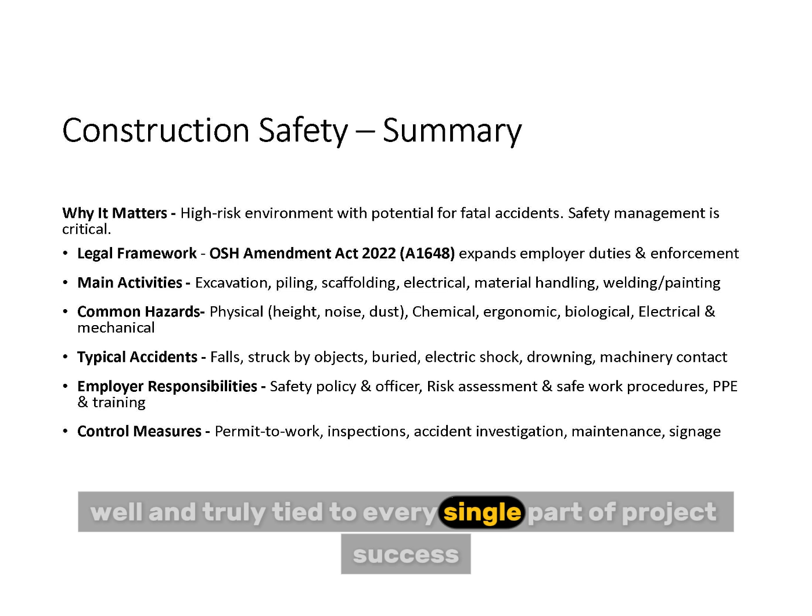So as we finish up, here's something to maybe mull over. Considering that expanded legal accountability, we talked about shared responsibility reaching clients and developers. If you were involved in a construction project, maybe not hands-on, but as a developer, client, or even an investor, how does that shift in liability fundamentally change how you'd approach ensuring safety, even if you're not the one wearing the hard hat? What does this really mean for the future of development, where safety seems well and truly tied to every single part of project success, right from the first sketch to the final handover? Something to think about.